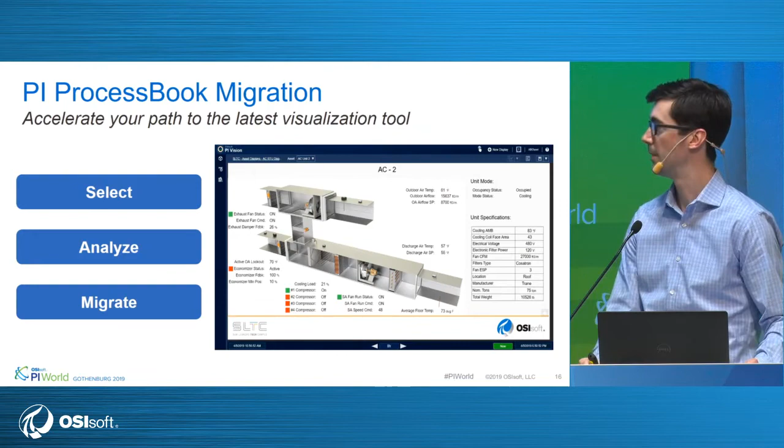So on the screen here, you can see this is one of our displays that we use for monitoring our headquarters building that was mentioned in the keynote today. It's a display that references our cooling system. And so here you can see the display, what it looks like in ProcessBook, and then what it looks like once it's been converted to PI Vision. But rather than do it on a slide, let's see how we can actually migrate this display.

Excuse me while I just readjust the windows. So this is the PI ProcessBook migration utility that will be released alongside of PI Vision 2019. So before we begin, the first thing I want to do is show you my PI Vision website, just so we can look at the end and see, hopefully you'll believe me, that these displays are actually getting migrated live in real time. So here is my PI Vision site. I will refresh just to make sure that we're seeing the latest. There's currently nothing in the home folder.

I have a folder with some displays called monitoring displays, but what we're going to do is I'm going to take an entire folder of ProcessBook displays and migrate them over to PI Vision, take a look, and compare them between ProcessBook. So this is our utility. It's broken up into two different sections.

On the left-hand side is the Files and Folders pane. So this is what you'll use to choose which displays and which folders of displays you'd like to first analyze for migration. On the right-hand side, you will view your analysis results. So you can see what within those displays can be migrated, what cannot be migrated, and you can make a decision of what you'd like to migrate at this point in time. And then afterwards, you can step forward with the actual migration of the files.

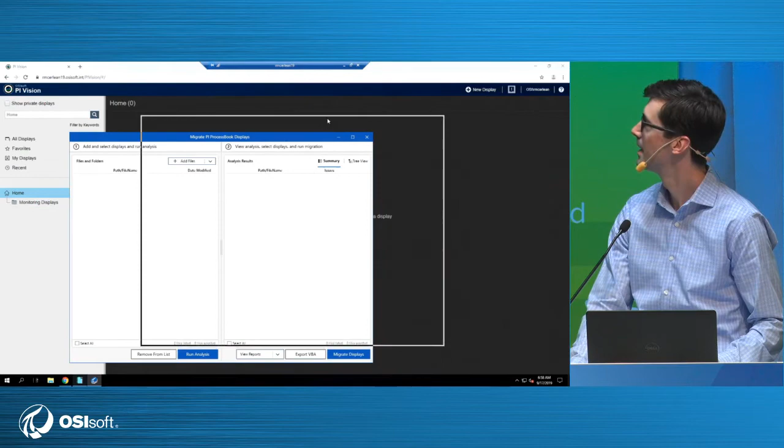And it's not cooperating because we have a live demo. Seems like we are frozen. It might be the whole session, actually. Yep. Excuse me for just a moment. All right. So it appears that my session did take the click to try to close the utility. So let me just get set up here again. All right. Just trying to get enough space so that we can see everything that's going on. All right.

So quickly add back in that folder. Now we can expand to see the displays. So the left-hand side of the utility lets me know that we have 19 displays contained within this folder hierarchy. So I know that these are displays that I'm considering migrating. So what I want to do is analyze these for migration and take a look at those results. So I will select all of these files and then move forward with running the analysis.

So the analysis is going to read the files, it's going to parse the files, and come back with analysis results. It's taking a look at everything contained, every component contained within the displays, and it will let us know what is compatible with PI Vision at this point in time. So our analysis has been completed.

So there are two tabs, two different views for the analysis results. There's the Summary tab and the Tree View tab. We will start with Summary. So the Summary view is broken up into categories. The first category is can be fully migrated. What this means is that every display contained in this category, every component within each of those displays can be migrated to PI Vision. So ProcessBook and PI Vision are two very different applications.

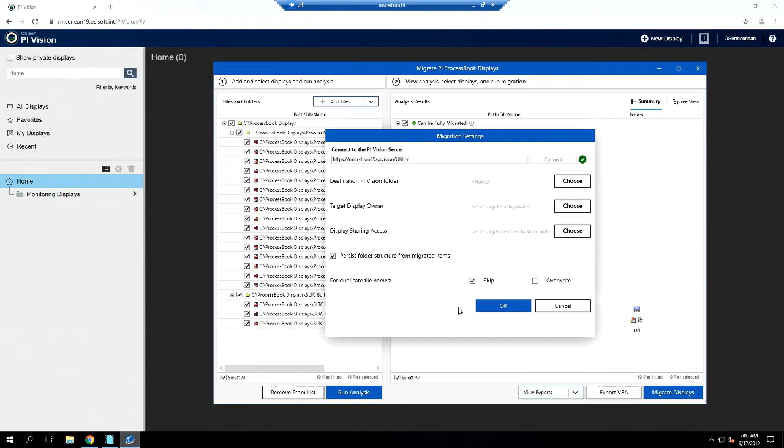So if you remember, I chose a top-level folder when I was analyzing the displays. If I choose this option, it will create that same folder structure in PI Vision. That way I can maintain the organizational structure of these files once they're migrated over to PI Vision. So with that, we'll go ahead and say OK, and we will begin migrating these files over to PI Vision.

I forgot to show you the tree view, but once the migration is completed, we'll dive in and show you what the tree view looks like and what information you can see there. So again, the migration utility is doing some pre-processing of the files, and then it will begin writing them over to PI Vision using the URL that you provided. So the migration is complete.

Showing off the tree view. So the tree view is just showing you a view of the displays similar to how they are on the left-hand side. So instead of grouping them by the analysis category, what it's doing is grouping them by the folders or how they're actually organized on the machine. So here you can see the folders. You can see the status is just in a column here, and you can also see the migration status.

So this indicates that each of these displays was migrated successfully to PI Vision. But we won't take the utility's word for it. We'll go check our PI Vision server and see how it looks. So you'll notice we now have a new folder here called ProcessBook Displays. If I dive into this folder, it has two subfolders, similar to the folder hierarchy the ProcessBook displays were in.

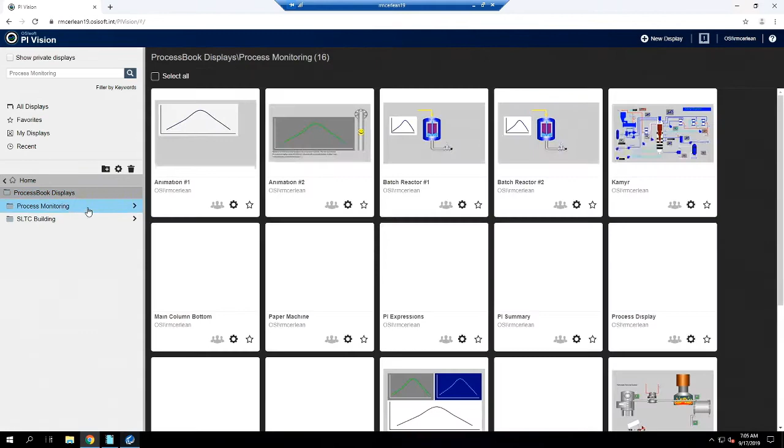If I look at the first folder, process monitoring, you can see there are 16 displays here that have been migrated. If you remember, the migration utility told us that we were migrating 19 displays. So the other 3 are over in this folder for the SLTC building. Let's just take a quick look at the displays, see how they came over, see how they've been migrated.

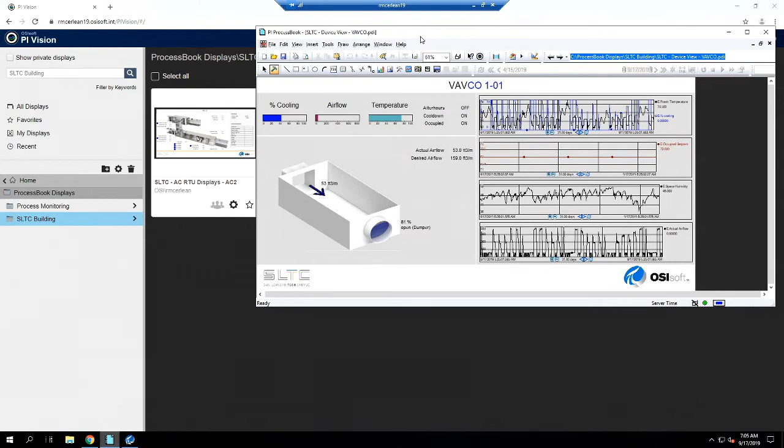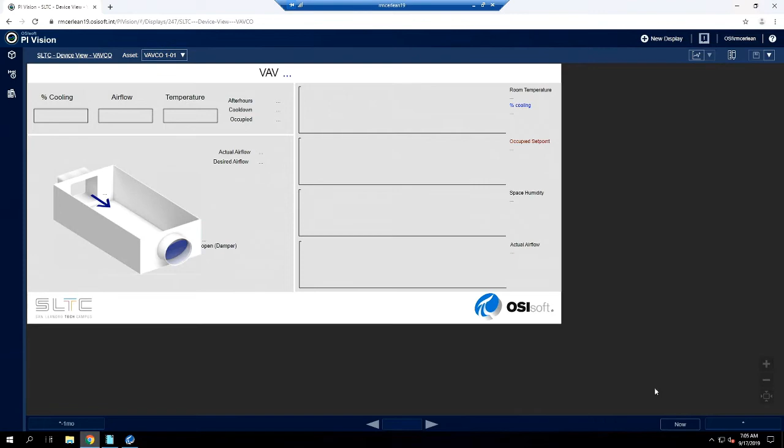So open up ProcessBook. This is a display that you might recognize from the keynote. Chris was using this display in PI Vision. So here is the original ProcessBook display, what that looks like. And then if we come over and pop that open in PI Vision. So as you can see, this is one of the ones where all of the components could be migrated over, and it looks pretty good.

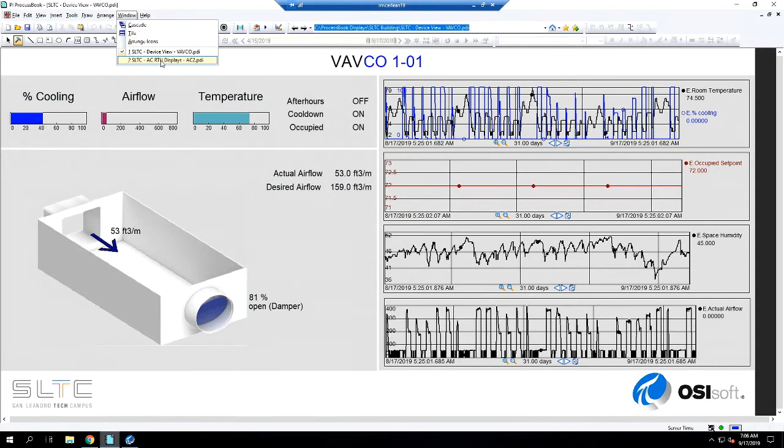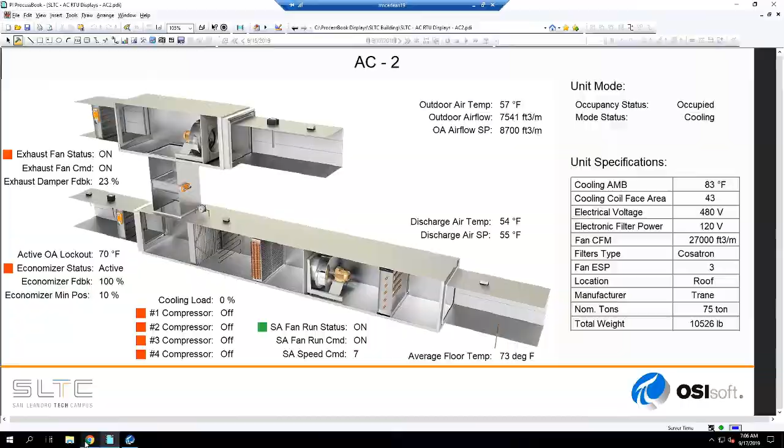We'll do one more example. So another display. So this is showing our cooling unit, and it's showing a bunch of data that corresponds to the cooling unit. And we're going to actually make more use of this display later on in the presentation today. But let's just see how it looks. Cool. And there it is. Cool.

So that is the ProcessBook migration. We'll be talking about ProcessBook migration a lot during the conference this week. Come by the booth if you'd like to see more, if you'd like to ask some more questions, or Andrew and I will be up here at the end of the presentation. But for now, let's jump back into the next topic.

So, as Andrew mentioned earlier, the other major feature in the PI Vision 2019 release is ad hoc trending. So the new ad hoc trending capabilities allow you to dive into a real-time investigation of your operations and quickly discover insights. So Andrew alluded to an ad hoc workspace. In this workspace, you can select data from across displays, add them to the workspace, analyze data, and identify the root cause of issues.

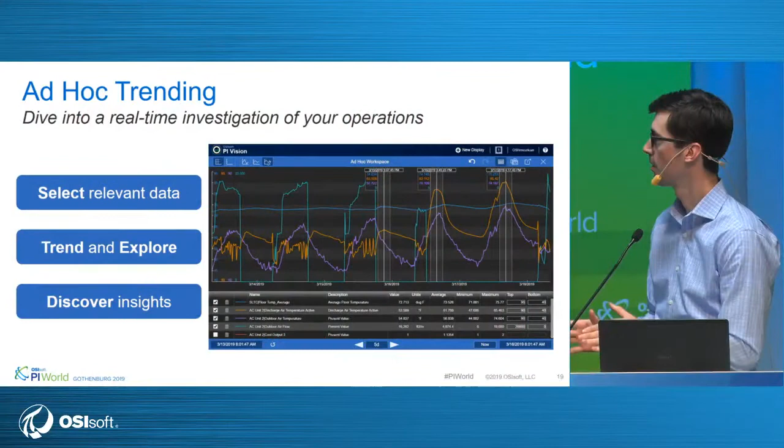So with ad hoc trending, the focus is on the data itself and not on the configuration. So we've optimized the ad hoc workspace so you can quickly pull in the data you need and get answers without having to spend time in configuration. So rather than spend more time explaining it, let's take a look at what this actually looks like in the product. Provided the live demo cooperates with us this time.

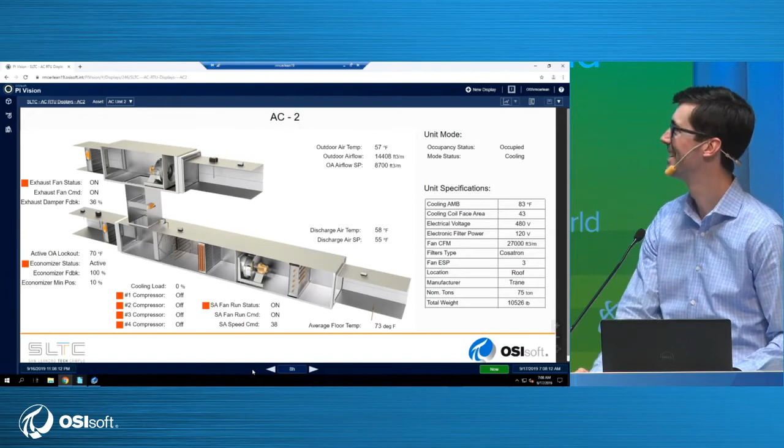Cool. So this is the display that we were just looking at. Right. And so earlier today in the keynote, Chris demonstrated some of the ad hoc trending capabilities. I'm going to take it a little bit further today and show you a little bit more. So as I mentioned earlier, this is a display of our cooling system for our headquarters building in San Leandro, California, over in the US.

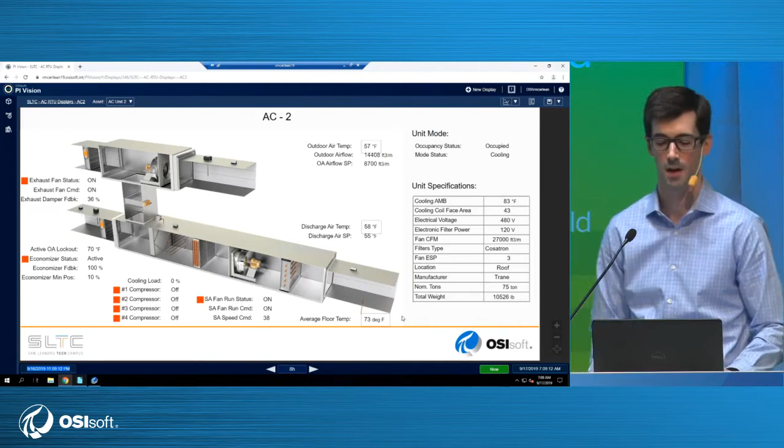So let's say that I come in Monday morning and I get asked to investigate an issue that occurred over the weekend. I know that there's something going on with the cooling system. I don't have much more to go on, so let's just start the investigation from scratch. So first thing I'm going to do is, I want to look at the outdoor air temperature, the discharge air temperature. This is the temperature leaving the system, as well as the average floor temperature. What does the temperature outside look like during the time that this issue was reported?

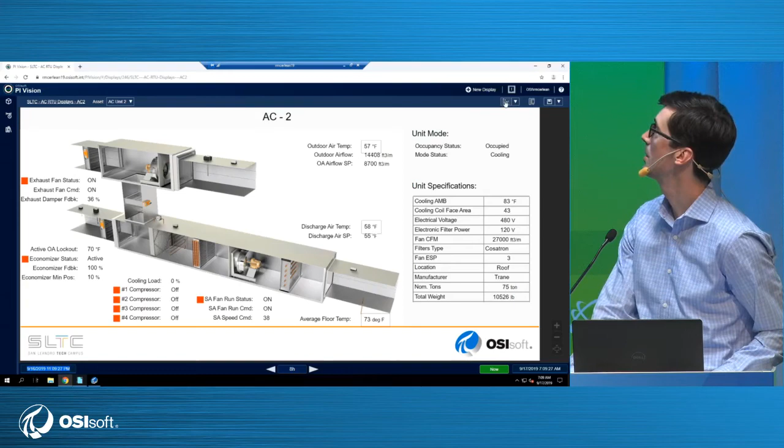So all I did here was I held the control key and I just clicked all 3 of these items. Now in the upper right-hand corner, I'm going to use this new button to add these items to our ad hoc trending workspace. One moment.

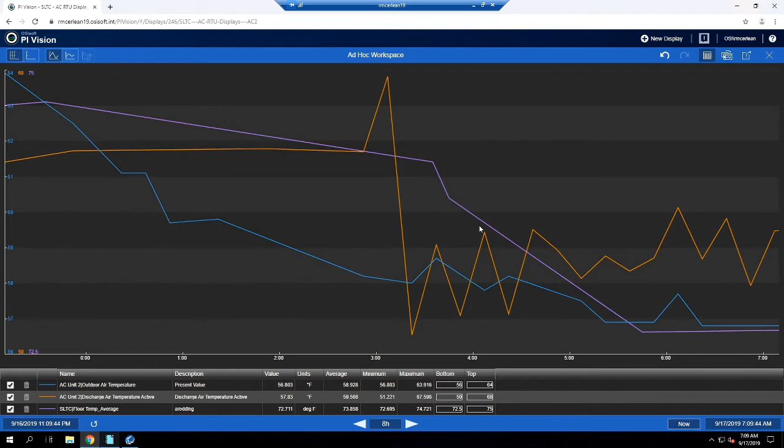Sorry, I was playing around earlier and I had some more information in there that I didn't want right now. Cool. So what that does is it adds these 3 items into the trend, and it's using the time range of the display. So the display was configured for 8 hours. Now this is looking at 8 hours worth of data.

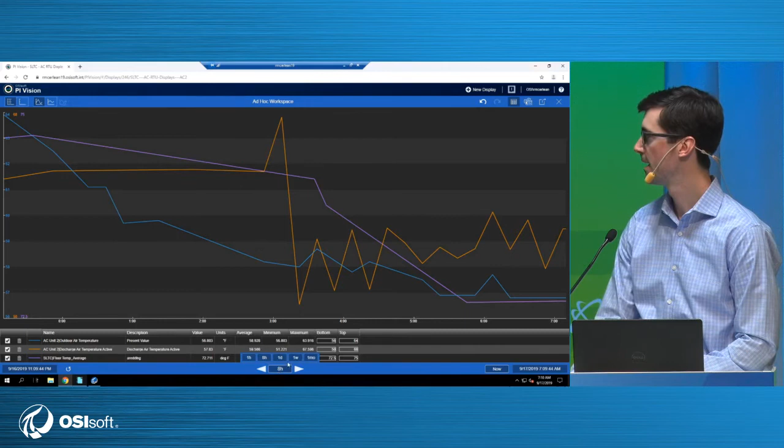So if you remember, my colleague mentioned over the weekend. So let's quickly zoom out and increase the time range here. Now, if you remember, I'm looking at 3 different temperature readings. So with a single click, I'm going to change this from a multiple scale trend to a single scale trend. Since everything is temperature, everything here is in degrees Fahrenheit, now they're all compared on the same scale.

Let's take a closer look at exactly what this data is and what it looks like over this period of time. So the first item here in blue, this is the outdoor air temperature. You can see it rises as the temperature rises throughout the day, and then it falls as the temperature gets lower in the morning and in the evening. The orange is the discharge air temperature leaving the system. So again, I zoomed out so I could see a full week's worth of data.

So in the beginning of the trend, I see early in the week, and then this area around here, this is the weekend. This is Saturday and Sunday. So I can already see as the week went on, and once we get to the weekend, things are definitely different. So we're going to take a closer look at that. Lastly is the indoor temperature. So what does the temperature inside the building look like? Again, we can see there's a particular temperature profile and pattern early in the week. Over the weekend, looks a little bit different.

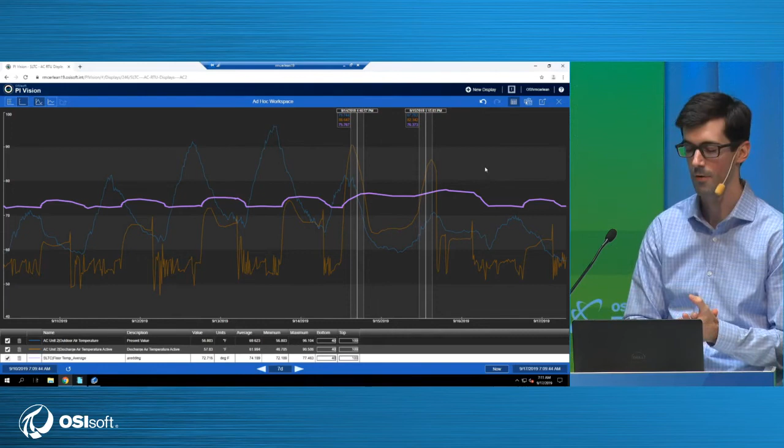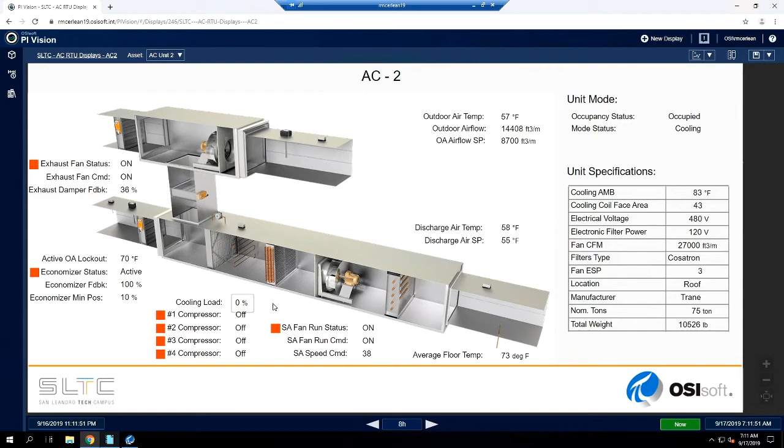So now I've already gotten some insights out of these 3 items. What I want to do is quickly go back to my display and pull in more data. So I will minimize the ad hoc trend, and then I will select the cooling load from the display. So this is an item that I already have on this display. I just want to quickly pull in to compare with the other data. So this is just one example. You can also pull in data from search, from other displays, as Chris did this morning. For this example, I'm just going to quickly pull in this item.

So if I select that and click the ad hoc trend button again, I now have a trend that includes 4 items. So I have the 3 items from before and the 4th item I've just added. It's starting to get a little bit busy here, so let's make a few quick tweaks. So with a single click, I can change this back to multiple scales. So I have 3 temperatures on here, as well as my cooling capacity. So since they're different units, I want to see them on their own scale now.

Another thing I can do to simplify this a little bit is let's go ahead and zoom in on the information that we are concerned with. Right, so rather than look at a whole week, let's take a look at Friday, see what Friday looked like, and then compare that to Saturday and Sunday. What's different over the weekend?

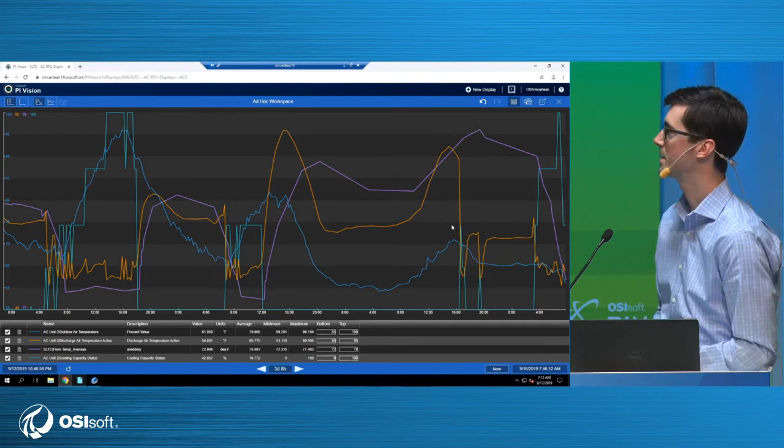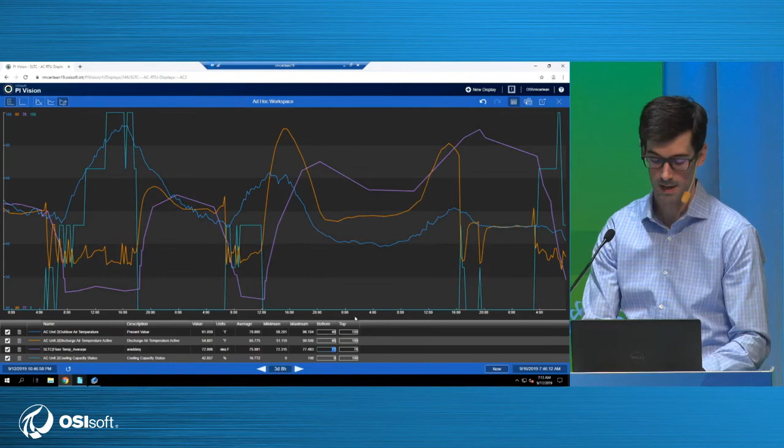Since I do still have 3 temperatures here, if I want to quickly put them on the same scale, I have the ability to do that. So you'll notice there are input fields down here at the bottom. What I can do is I can manually set the scales if I want to normalize that data. If there's too much information on the screen, I have the option to either hide or remove traces. I think the orange trace, the discharge air temperature, was the most useful. So let's take a look at that one right now.

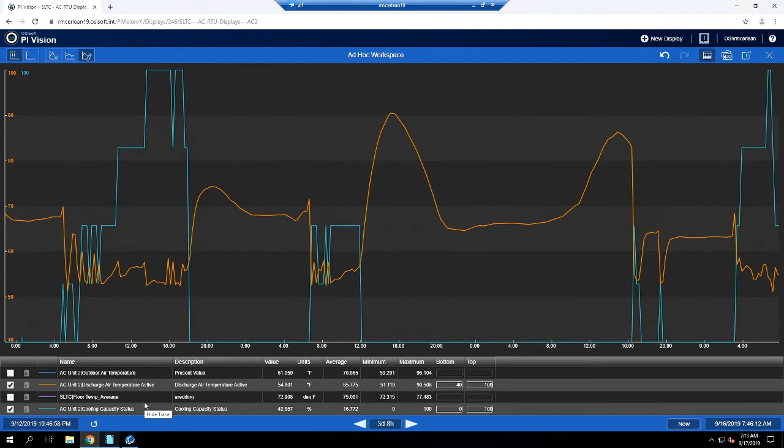And again, so the newly added information is here in blue. This is our cooling capacity status. So if we take a look at Friday, what happened on Friday? It looks like around Friday at, hard to read from here, I think it's around 5 a.m. This is when our cooling system was engaged. Cooling system came on during midday. That's when it was really, really cranking. And then it shut off around 6 p.m. So that was Friday. On Saturday, 6 a.m. the system comes online.

Right around noon, this is Pacific time, the cooling system shuts off. And if we look here, we have a rather large gap. All the way over to here, the system comes online a little bit, but not for very long. And then it doesn't really fully come back online until Monday morning. So it's clear that the cooling system wasn't acting as expected over the weekend.

So at this point in time, this is as far as I can take the issue. I need to send this over to a colleague who can continue and move further along. So what we're going to do is click the share button, copy this link, and I can just paste that into an email, send it over, and they can pick up the investigation right where I left off. Cool. And that is the ad hoc trending feature.

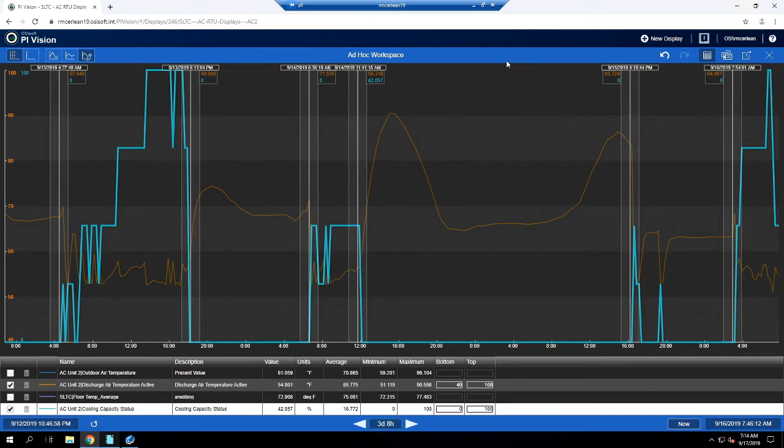Let's see if I can get back to the slides.

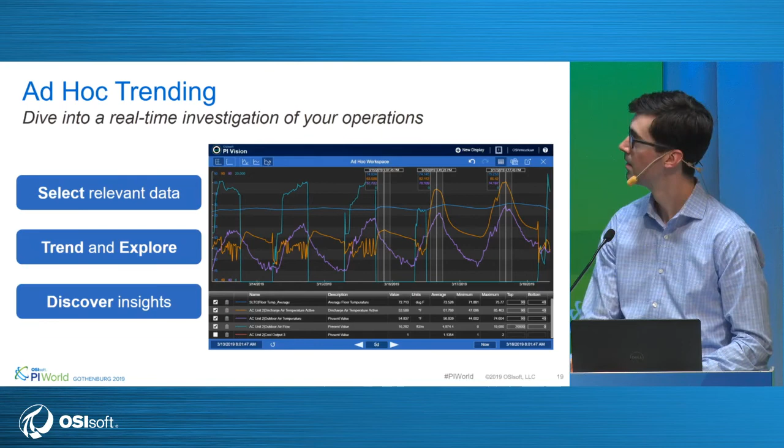All right, so let's quickly reflect on the items that we've covered today. So Andrew told us about how PI Vision is an easy-to-use, self-service, scalable solution for data visualization. PI Vision can help you become more efficient and optimize your process. Andrew also discussed the different benefits of PI Vision and how they exceed just the end user, and they really extend to the entire organization. We also covered and we focused on PI Vision 2019 and the new features and the value that they can add to your system and to your operation.

So PI Vision 2019 really is the next step for data visualization here at OSIsoft. And PI Vision 2019 adds this key new functionality.